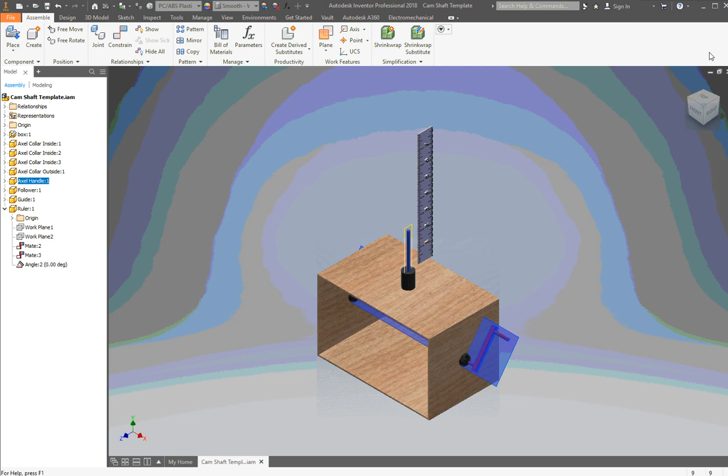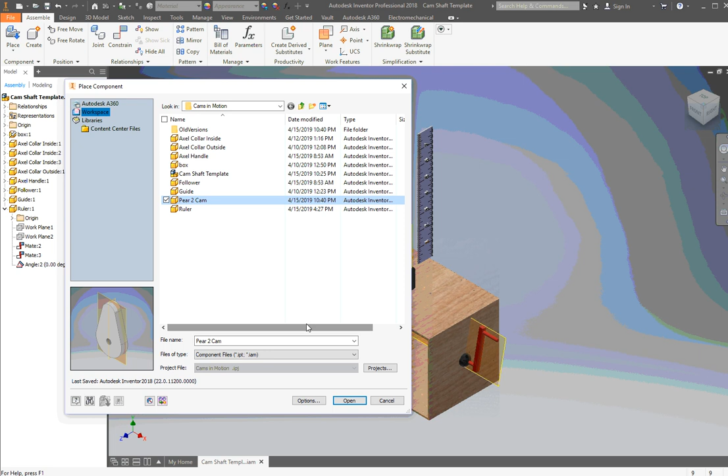So in our last video, we went ahead and assembled this camshaft template, and we named it camshaft template for a very good reason, because we're going to reuse it for multiple different cams. But now we're ready to place a pear cam onto our camshaft. So we'll go to Pear 2 Cam, hit open, and place it in. Right click, OK, and we can start connecting it.

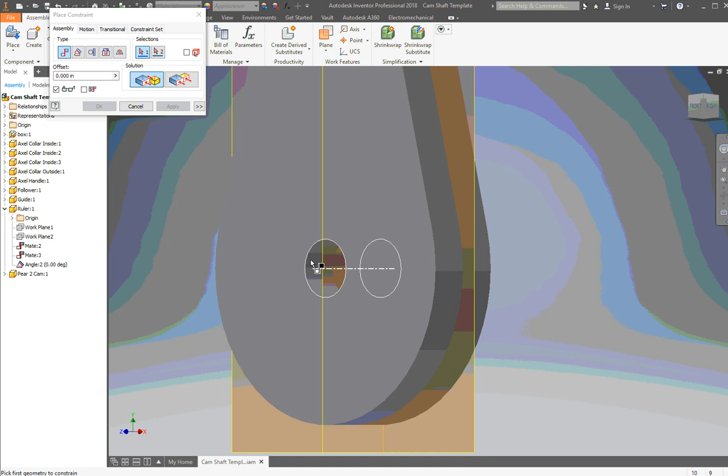We're going to go to Constrain and use our mate again, and hopefully it'll make a little more clear what we discussed in our last video about degrees of freedom and how they work. I'm going to select this, and with a mate, select the inner circles here, making sure you're getting that center line, the two outer circles, and mate that to the axle of our camshaft. It should highlight the cylinder, and I hit apply, and you can see it locks it on there.

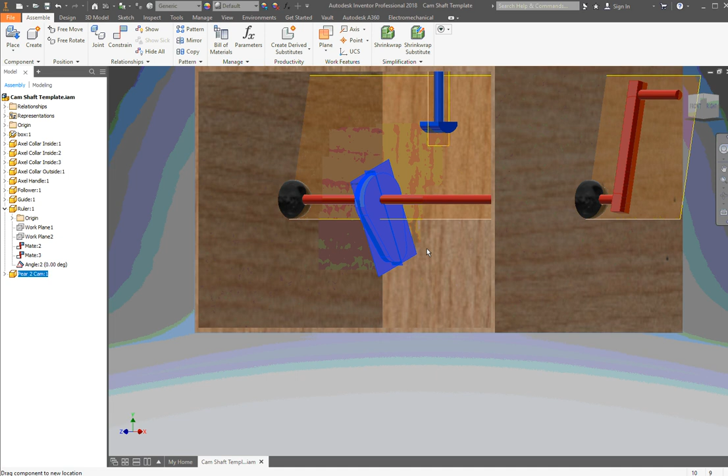Why is it so important to use a mate instead of an insert? Well, because it can not only rotate around our cam, but it can also slide left and right. This is what I mean by degrees of freedom. So it can rotate, so there's 1 degree of freedom in a rotation, but it can also go left to right. And there are 6 degrees of freedom in total.

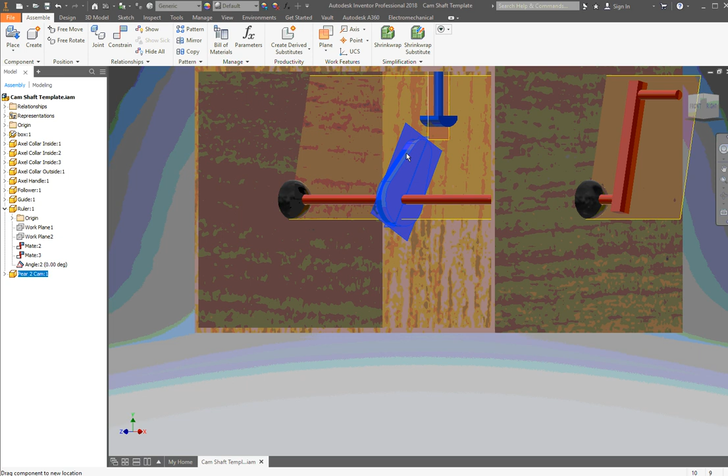So there's 3 directional degrees of freedom - it can go up and down. Of course, this can't go up and down, but this follower can go up and down, for example. That's that degree of freedom. But this can't, because it's connected to this axle, which is stuck in our box. And it can't go forward and back either - neither of these can go forward and back. So that's another degree of freedom.

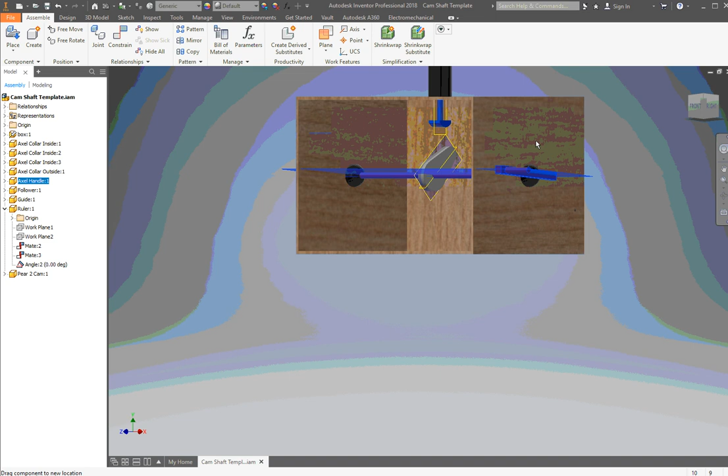But this lost both of those directional freedoms, so it's only left with the 3rd degree of freedom, which is left and right. And then of course there's 3 rotational, but it's only left with the last one, which is spinning in this direction, this front flip and back flip rotation, as is this camshaft, this axle handle for our camshaft, if you notice.

Speaking of, we can go ahead and align, and that's actually what the work planes are for. You might have noticed there are work planes on both of these. If you notice as I spin them, there are certain work planes that can line up, and we actually want them to line up if you think about it. So what I'm going to do is mate those 2 work planes together that clearly are parallel to each other.

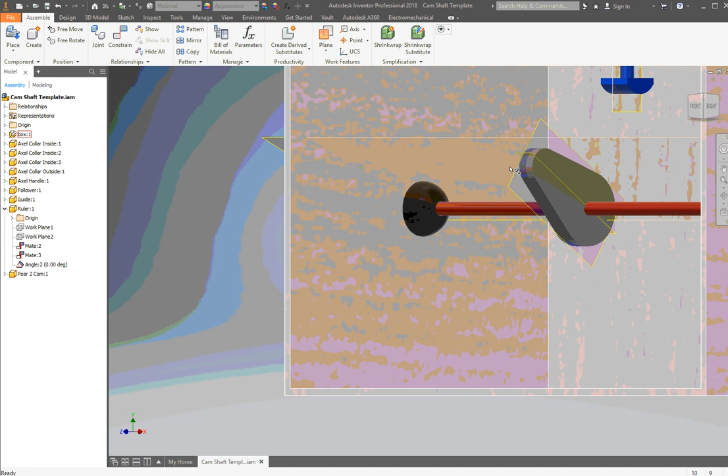So we'll go to Constrain, we'll go to Mate, and I want to select this thinner work plane on my cam here with the work plane of our axle. And we hit apply, and you might notice, well, now they spin together, which is kind of what we want - it's kind of the idea.

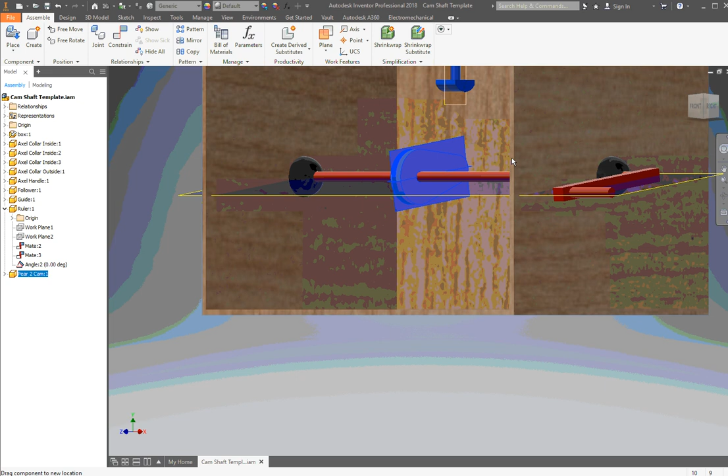Although we didn't really lose a degree of freedom with our axle because it can still go left and right, it's just constrained to our axle. To lose that 2nd degree of freedom, that directional degree of freedom, we need to line it up with our follower here. So if you notice, it can line up if we line up these 2 work planes here.

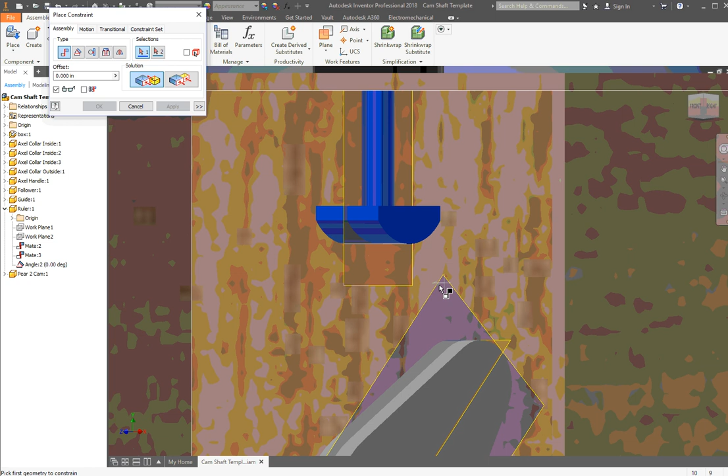So we're going to do the exact same thing. Let's go ahead and pick a view that we can see it. We're going to go to Constrain, we're going to go to Mate, and I'm going to lock this work plane onto this follower's work planes. And we hit apply. So what does that do? Well, if you notice, now it's stuck in place. I can't move this camshaft left or right anymore. It can only rotate along with its axis, giving us only 1 degree of freedom.

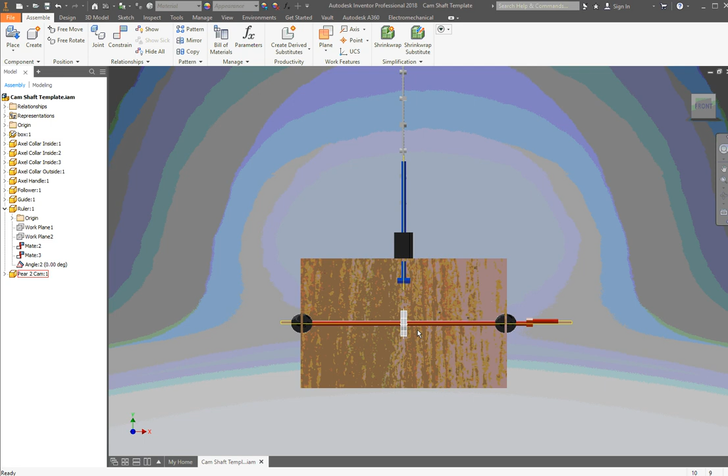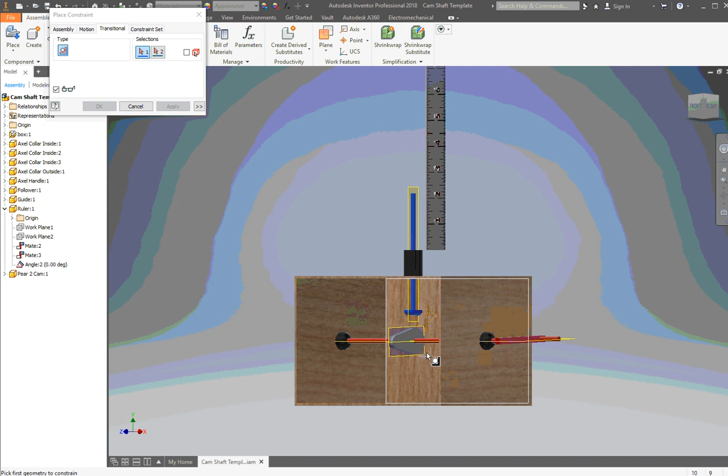The next constraint is a new one, and it's going to lock our follower to our cam so they move together. Let's go to Constrain, and this time to a new type of constraint, not motion but transitional. It wants us to select 2 faces, and it's very important that you select the correct 2 faces and in the right order. If you don't, you're going to have to start over, so rewind this video if you need to. But what are the 2 faces?

I want to select the 2 faces that I want to connect. That would be the bottom of this follower, so I'll select that, and I want to connect it not to the inside, but to the face that it's going to wrap around. Click any of the faces you want it to wrap around, one of these rounded edges or edges on the outside, not the side. Those are the 2 faces.

I'll select them again. Go to Constraint, Transition, and select this bottom face, then one of these faces on my cam. It doesn't matter which one, as long as it's one of the outer edges that it would connect to.

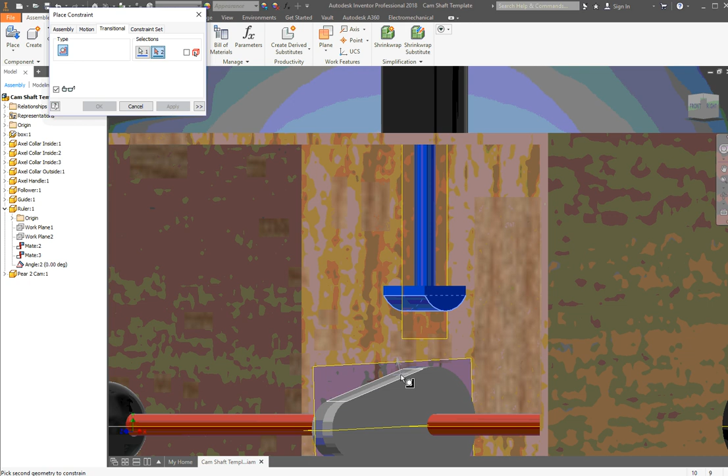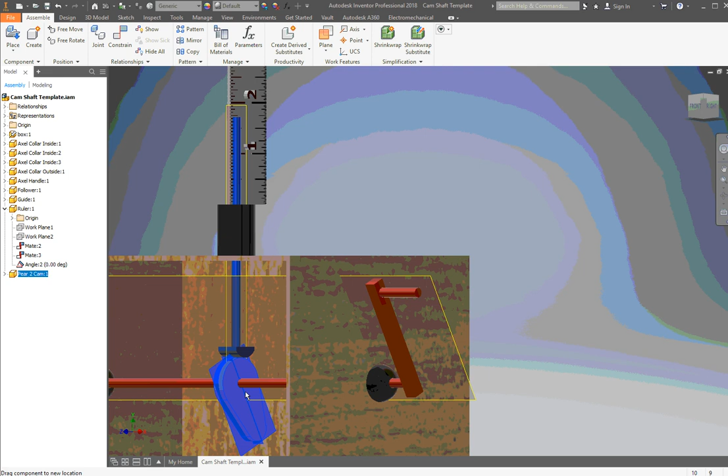I hit apply, and now if you notice, as I spin my axle, it will push up the follower, which is kind of the idea. You can play around with it, and even measure how much it rises up and down with your ruler as you spin the axle. You can see it rises at different distances. At certain angles, it doesn't spin at all or go up and down, which is kind of obvious because it's circular here—it's not changing the radial distance until we get to a certain place on our angle.

Speaking of which, we can do one more thing: we can make this an animation. Right now we can just spin it around and see how it works, but we can actually turn this into an animation. Let's look at how to do that.

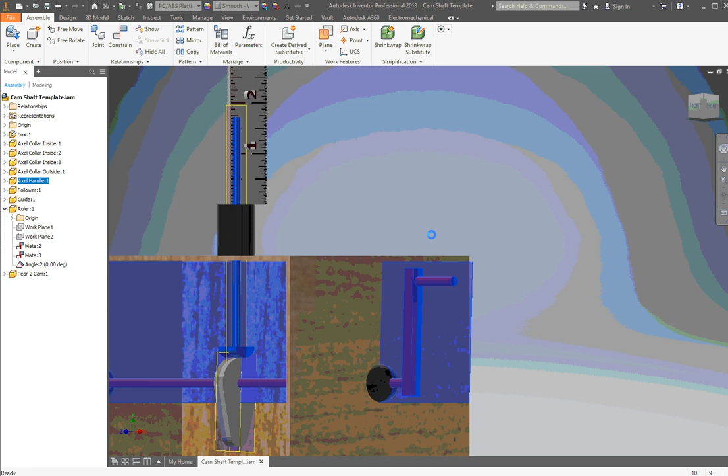Let's go to Constrain, and go to Angle. I want to select this 2 angle again, the directed angle off to the left, and click on my work plane. I want to angle it off of this face right here, this front face, and we hit apply.

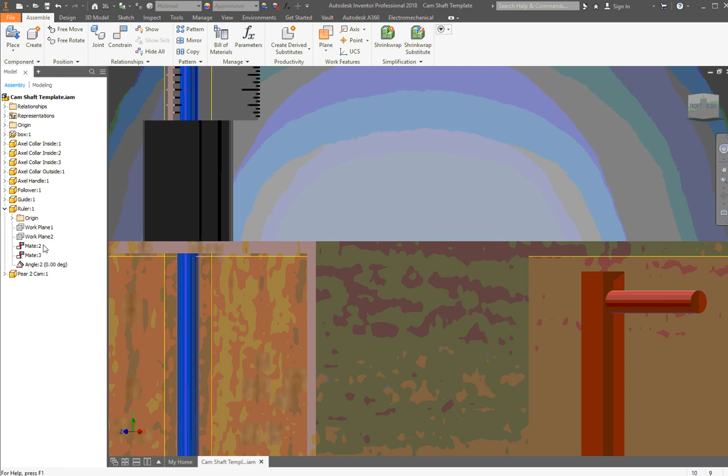Now I want my ruler option closed out because I don't want to mess with any of those constraints. I actually want to mess with the constraint I just put on, which was my follower, or my axle handle's work plane. I'll open that up and you'll see that angle constraint that we just added.

This is so important because I can actually open that up and change that angle. I can go from 10 degrees to 45 degrees, open it up and go to 90 degrees—make sure you select it correctly—but I can double click on it and go to 180 degrees if I want to.

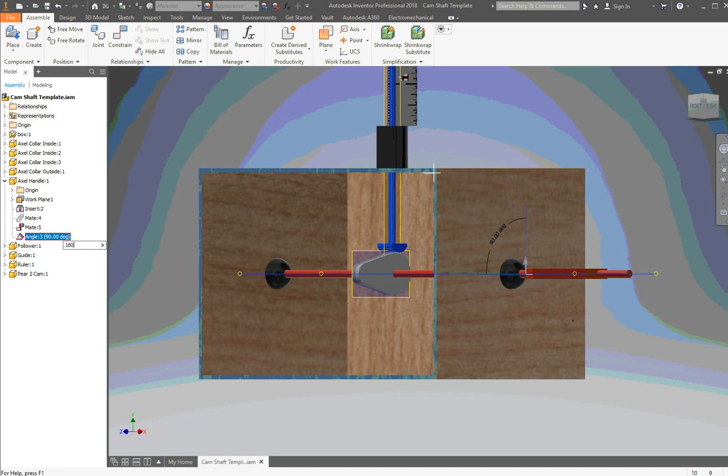And actually, it looks like we're having some problems with that. So let's try just changing it a little bit, to 120, and see what happens. You can see it's starting to lift it up—that's because we're starting to get to a point in our rotation where it's starting to push up the follower.

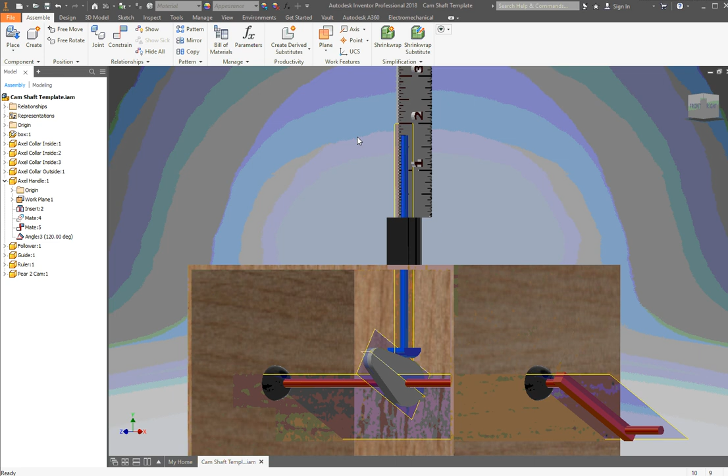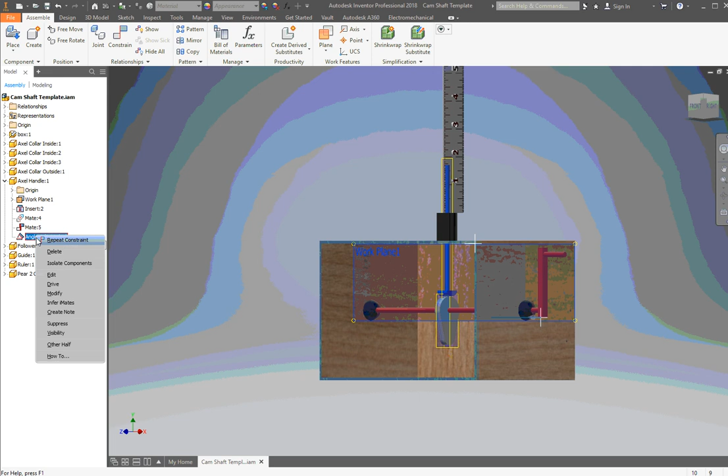And why is this so important? So I'm actually going to go back to 0 degrees on this, so it's back at the top here. I want to right click on this angle constraint, which I can't rotate anymore because it's stuck on the angle constraint. If I wanted to, I could delete this constraint and free rotate it, but I actually want this angle constraint here to make the animation. I'm going to right click on it and go down to Drive.

I'm going to go ahead and hit play, and you'll see it move 10 degrees. I can go back and forth because it's saying it's starting at 0 degrees and going to 10. I'm going to change it to not 360, but 3,600.

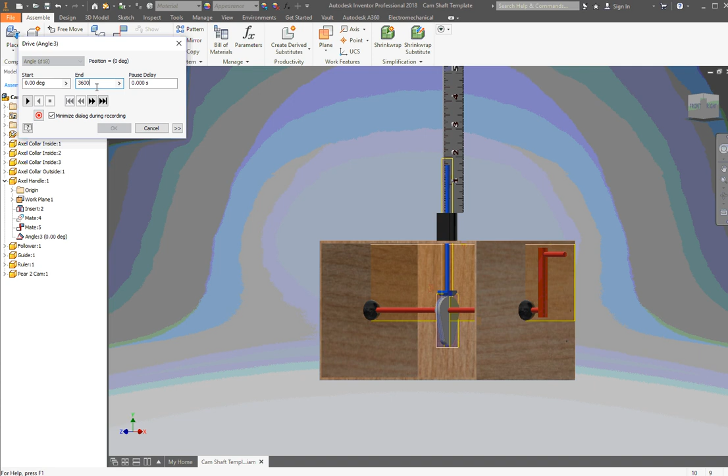And what does that mean? Well, that's 360 times 10. 360 degrees is 1 rotation or 1 full circle, so 3,600 should be 10 full rotations. Let's go ahead and watch, and you can see it's going to spin 10 times around.

You can see how the follower moves as it does. You can actually look at the angle that it's at the moment, and you can see the follower rise up and rise down. It's kind of fun to play with.

And in fact, we can actually open this up and we can slow this down. We change the amount of value of the total number of steps. We change it to 0.5, let's make it 0.5, not 0.54, and you'll notice that it's slowed way down.

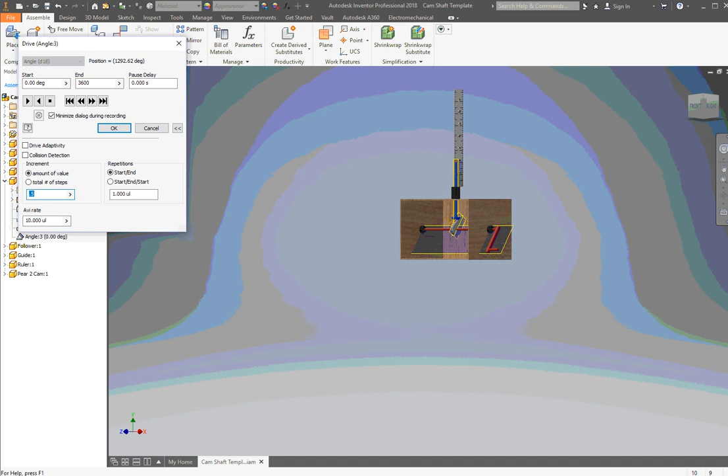Or I can make it 2. Don't hit enter. Let's go ahead and open that back up, right click and drive and hit play. And you can see it's going a little bit faster. I can open up this again and make it 4, and it's going to spin even faster. You can kind of play around with it.

It's kind of fun, and you can even record the animation if you want. We're not going to learn how to do that in this video.

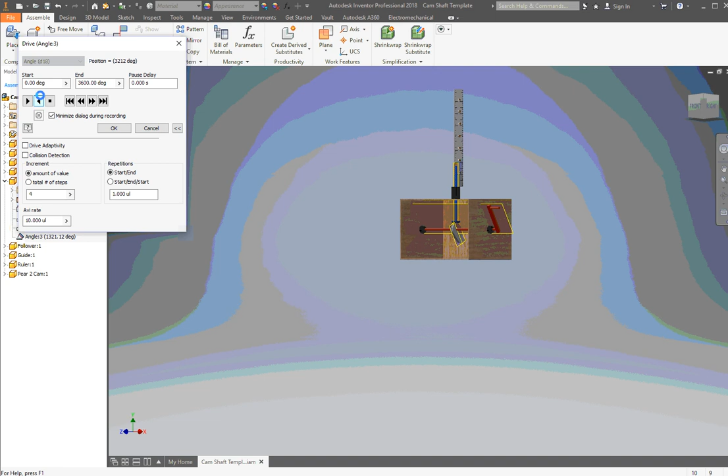And you saw we just saw save reminder. That's actually a good place to stop and actually rename this file. We're not going to hit save because I don't want to change the template, I don't want to lose my template here. But what I want to do is, once you're done playing with it, is don't hit save, but go to File, Save As, because this is actually not going to be our new template. We don't want the pear cam on our template.

We want to go ahead and name it something else. So I'm going to call it camshaft, and I'm going to give it the name of our file that we put on, which, if you look, was pear 2. So I'm going to call it camshaft pear 2 assembly.

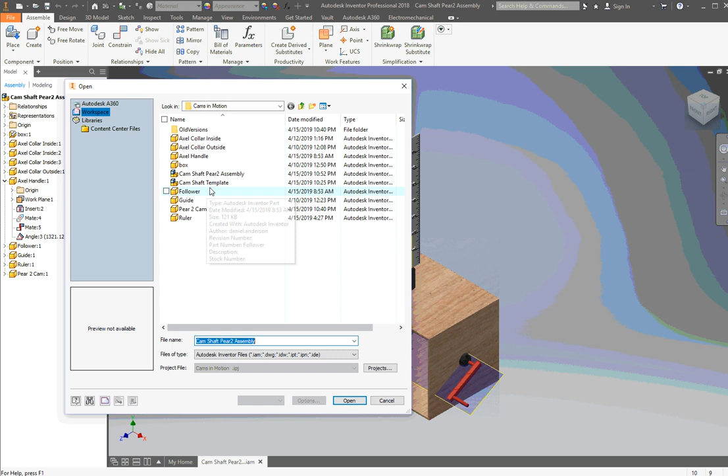And hit save. And why is that so important? Well, because now, select yes, and because now when I go to open, I can open up my pear cam already built, but I can also open up the template without it, so I can add more cams to that later and save those files as well, and I can have multiple different files to work with.

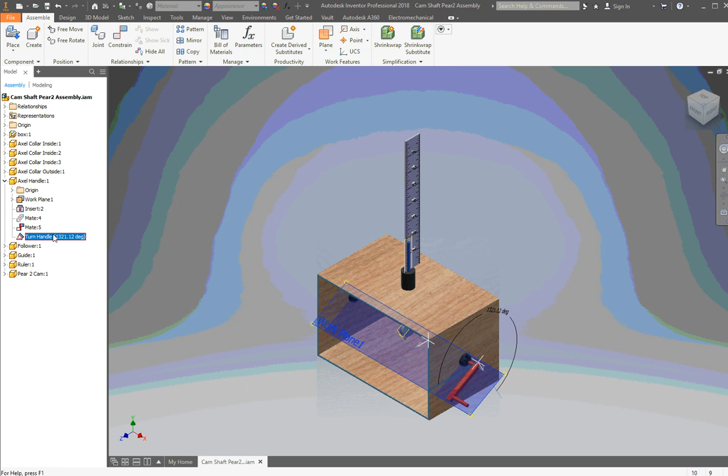And one more thing, you can actually change the name of this angle to something more to your liking, like rotation drive, or turn handle. We can even call it just something, any turn handle. And so you can remember, well, this is the constraint that you would run a drive on to turn the handle, turning the cam, raising up the follower up and down.

And of course, you don't have to name that, but I find it's nice to name these. That way you don't accidentally change an angle constraint instead that you created on something else. Like we added an angle constraint to our ruler. We have a name for it. You can edit your names.

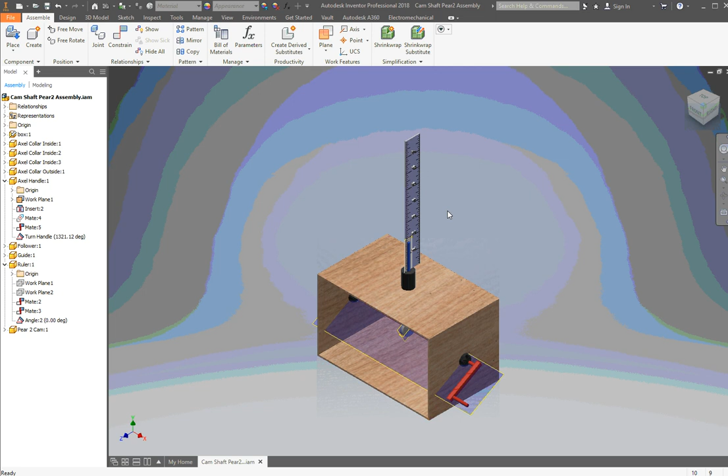And it just makes everything organized and easier to find, and that way you just don't get confused. But again, that's your choice. You don't have to add that if you don't want to.